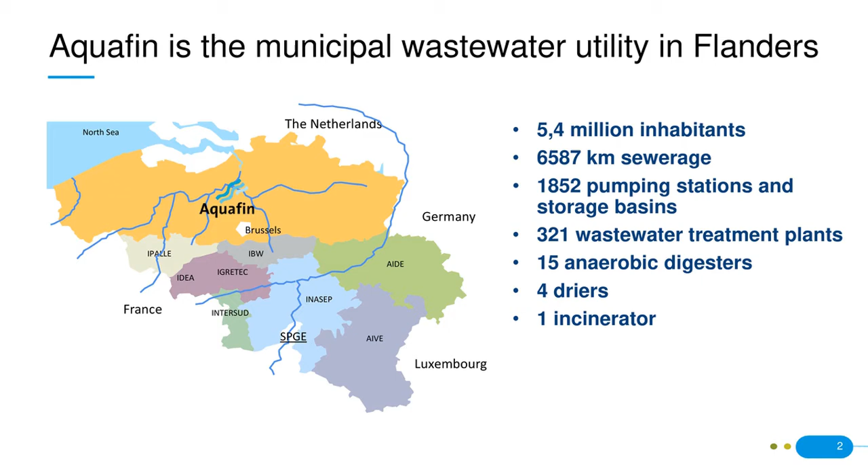I was asked to give a presentation about circular economy in Belgium in the water sector. I'm doing my best to give examples from the whole of Belgium, but I will always refer to cases of Aquafin because those study cases are the ones I know best. I will also talk about a few initiatives that have nothing to do with Aquafin.

I always use the word wastewater. This is my mistake, because wastewater doesn't actually exist. We shouldn't speak about wastewater, because what is waste for one person or one company is not waste, but is a resource for another company.

These are a few examples of resources: COD, which means organic matter, nitrogen, phosphorus, and potassium, that are coming into our wastewater across all 300 treatment plants every year. This chart indicates the breakdown of what happens to these resources. Most of them are lost in the atmosphere as CO2, for example, or nitrogen gas.

Some of them are lost in the effluent, and a big fraction, especially for phosphorus, is lost through the sludge. It's then incinerated.

On the other hand, it makes sense to recover all of these resources because there are reasons why we should recover them. For example, if we look at COD, it takes energy — there's a huge energy consumption needed to remove COD from wastewater. It also causes greenhouse gas emissions.

If we look at nitrogen, it takes energy to remove it from wastewater, but then it takes energy again to fixate nitrogen from the atmosphere to produce fertilizers, which is 1 to 2% of the total energy use in the world. That's huge. For phosphorus, there's resources and mines that are under geopolitical pressure.

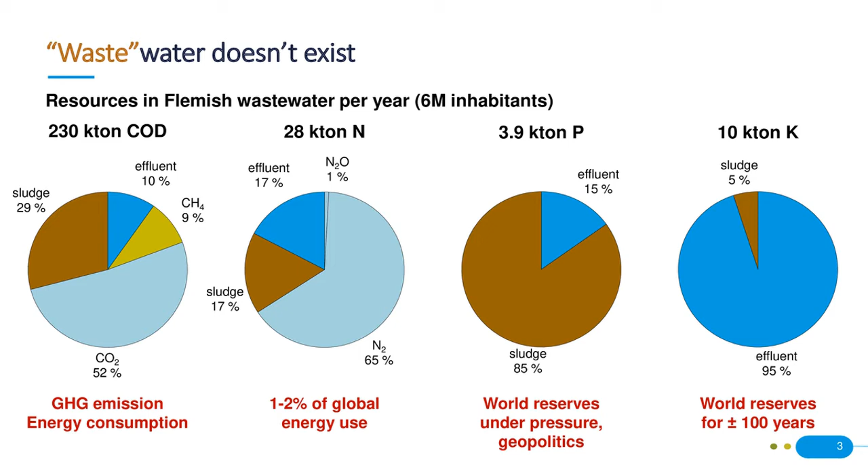For potassium, maybe that's the most urgent resource of all, because we only have reserves in the world for another 100 years. So we need to come up with a way to recover that.

And then maybe the most important resource of all is water itself. Wastewater is full of water that can be reused if it is treated properly.

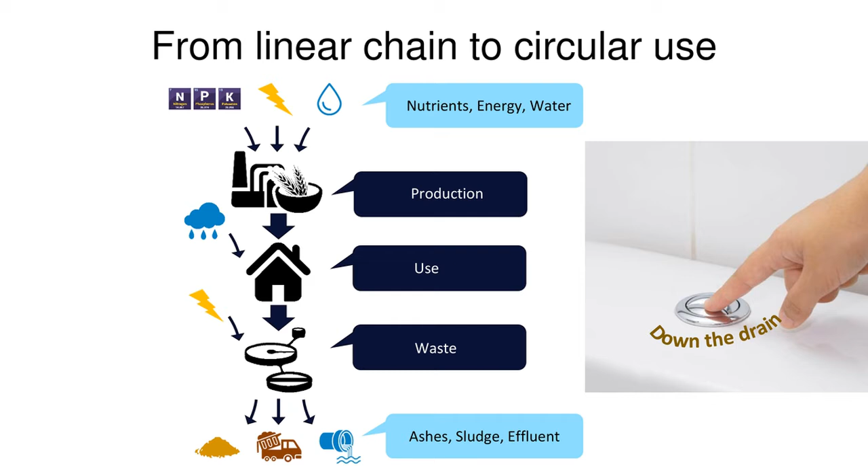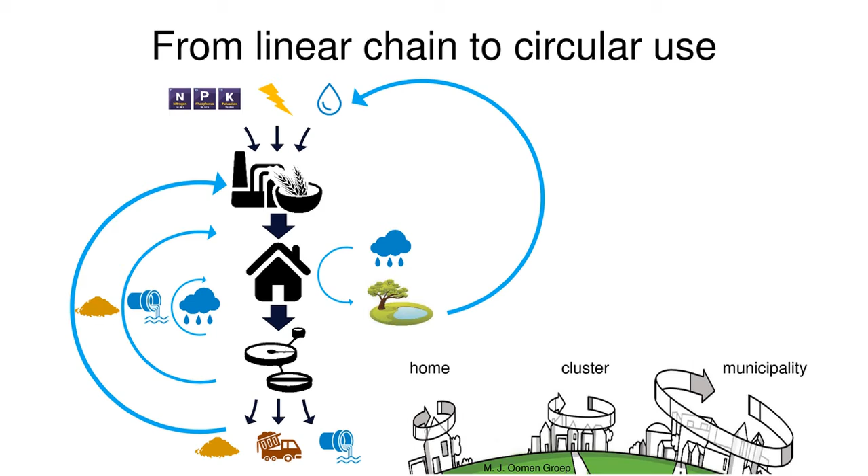You might have seen this principle somewhere else, but the message I'm giving in this presentation is that we need to move from a linear chain of resources, used only once in our economy and then wasted or disposed of as waste in the end, to a circular chain where resources are reused at different locations within the chain, and at different scales, from a household scale to a cluster or municipality or even a national scale.

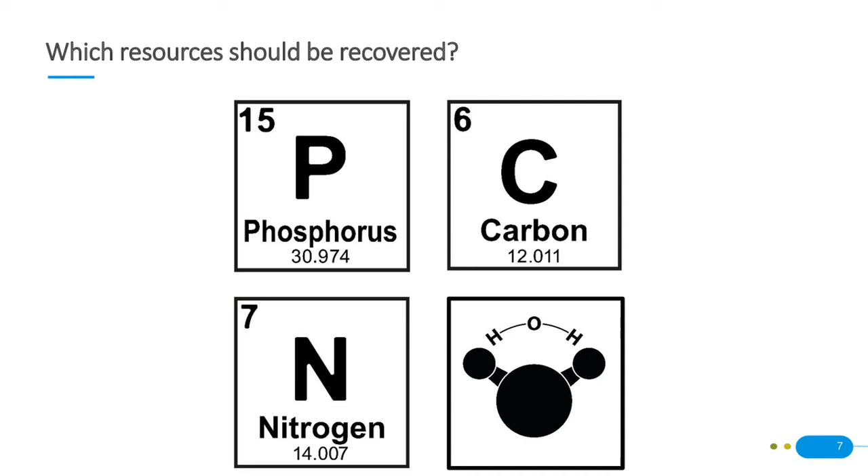A few examples of resources that are being recovered or that can be recovered from wastewater. To start, phosphorus. Phosphorus recovery is pretty simple actually, because phosphorus has fairly easy chemistry.

It can be precipitated into crystal form, or it can be recovered from incineration ash. If you incinerate the sludge, you can leach out phosphorus and produce a concentrated solution of phosphorus that can then be reused as fertilizer.

Phosphorus recovery in wastewater can happen at different scales or at different sites within the cycle. If we start with pure urine, this is an easy way to recover phosphorus. So if you have what's called source separation, you separate urine from the other streams of wastewater. You have a fairly pure stream full of nitrogen and phosphorus that can be easily recovered.

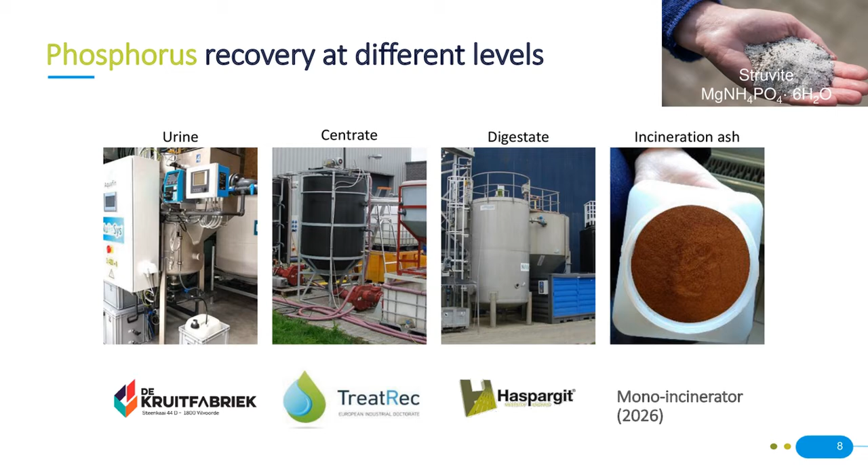There are examples. These are all pictures of Aquafin installations. Examples of recovery installations for phosphorus on the centrate, on digestate of digested sludge. And we're also planning a full-scale phosphorus recovery on the ashes of incinerated sludge by 2026.

Those of you that are familiar with the Volatile project know that we can recover VFAs, so volatile fatty acids, from carbon from the sludge. But also all of these examples - bioethanol, biochar, CO2 itself, humic acids, microbial proteins, etc.

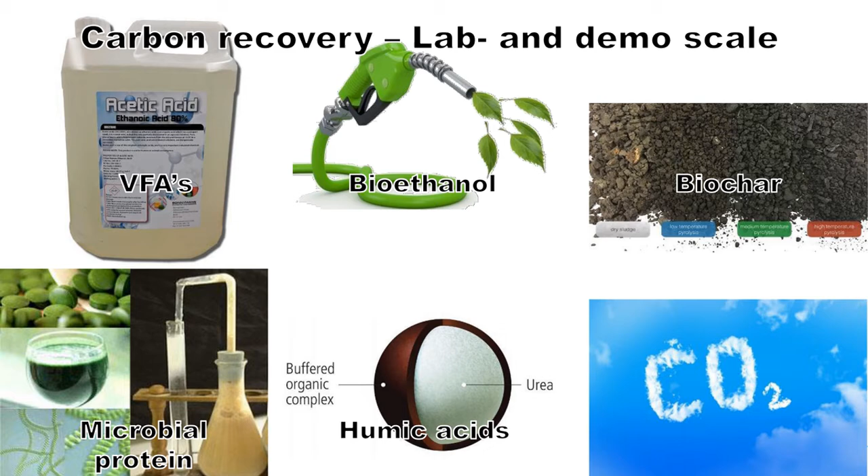These are at different levels of application. Some of them are in the pilot scale stage. Some of them are only in the lab stage.

But there is always a trade-off between recovering carbon as a product or recovering it as an energy carrier. Carbon is a carrier of energy, and if you incinerate carbon, you produce heat or electricity. And so for Aquafin, we are actually focusing mostly on recovering carbon as energy and not as a resource.

This can be done in two different ways: either internally in the plant by optimizing the energy balance of the treatment plant, producing biogas, boosting the production of biogas and recovering electricity by incinerating the biogas, or externally by treating the sludge.

So the waste sludge of the treatment plants can be treated in thermal ways - just incineration - or more novel technologies such as supercritical oxidation or pyrolysis, or things like that, to recover energy from the sludge. I will talk about energy a bit later on in this presentation if there's still enough time.

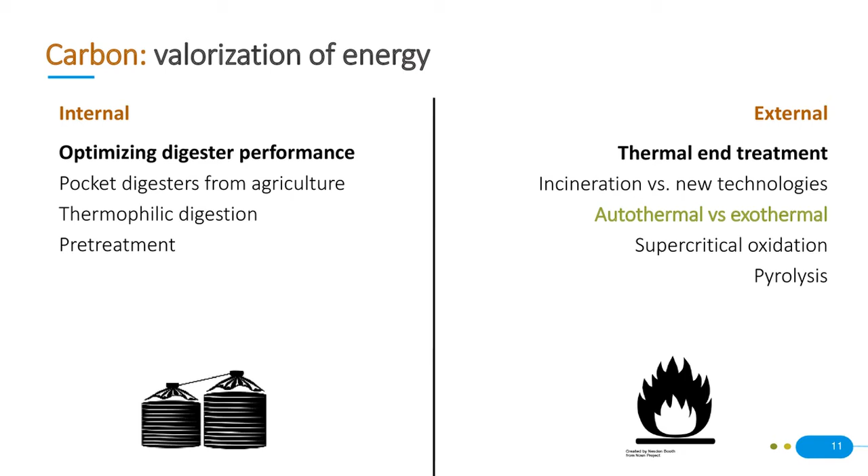Another resource is nitrogen. This is a funny resource because there's actually no shortage of nitrogen. The atmosphere is full of nitrogen. We can recover it by simply fixating nitrogen on an industrial scale to produce fertilizers.

It is not difficult to recover nitrogen from wastewater either. It's mostly a question of energy. It takes a lot of energy to recover nitrogen from wastewater because it is mostly done by stripping ammonia from the wastewater and then precipitating it again to produce a concentrated solution.

So recovering nitrogen is always a question of balancing energy needed to recover it versus the energy that is needed to remove the nitrogen and then fixate it again to produce fertilizers. To boost this development a little bit more, we are planning a demonstration project to recover nitrogen from centrates in our treatment plant, one of the treatment plants we have in Antwerp.

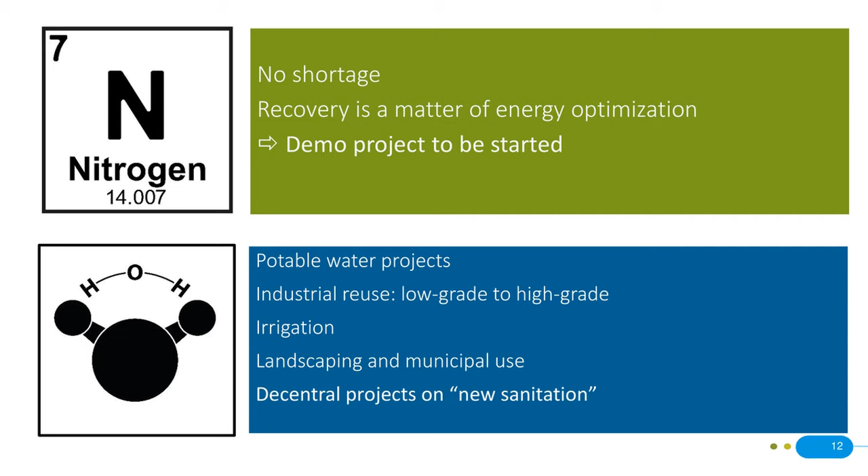And then finally, as I said, the most important resource of all of them is water itself. If we treat wastewater, we produce an effluent. This effluent can either be used directly for low-grade applications, or it can be further processed and treated to produce even drinking water or high purity industrial waters. I will give a few examples of what's happening in the case of water recovery.

Obviously, for personal hygiene and for food and drinks, we need potable water, but we do not need to flush the toilets or do laundry with potable water necessarily. So we should rethink this cycle. How can this be done?

This is my personal opinion on how we should deal with the water cycle. I will walk you through this scheme. So first we have tap water. Tap water or potable water should only be used, in my opinion, for applications that need potable water.

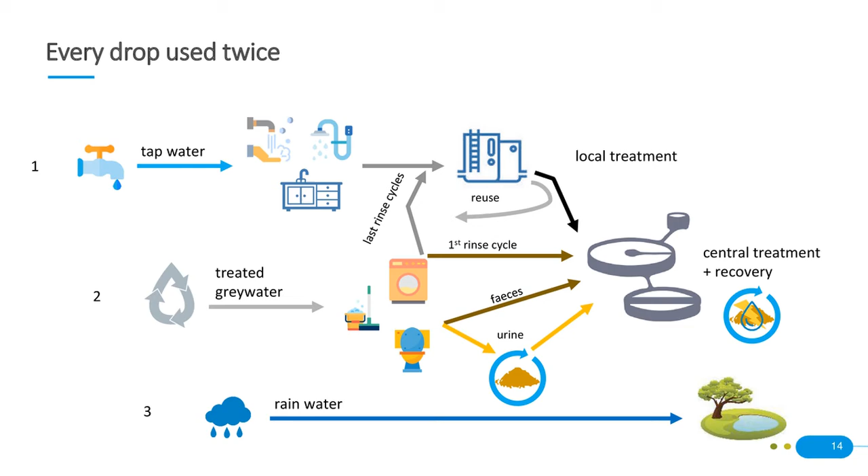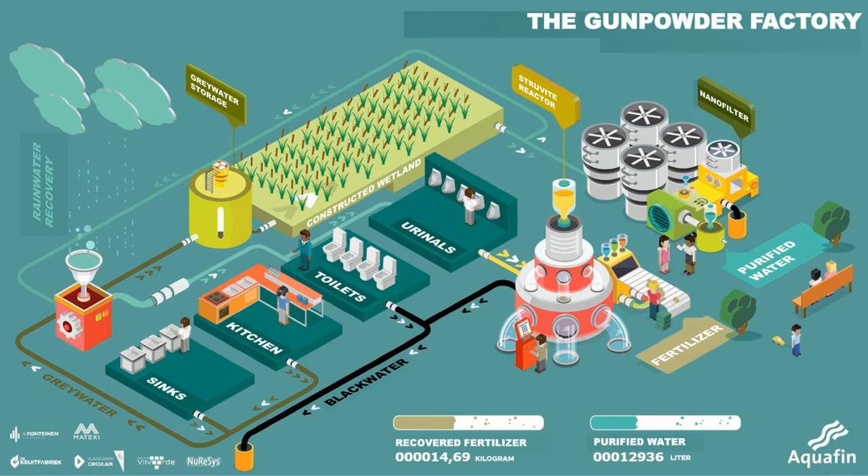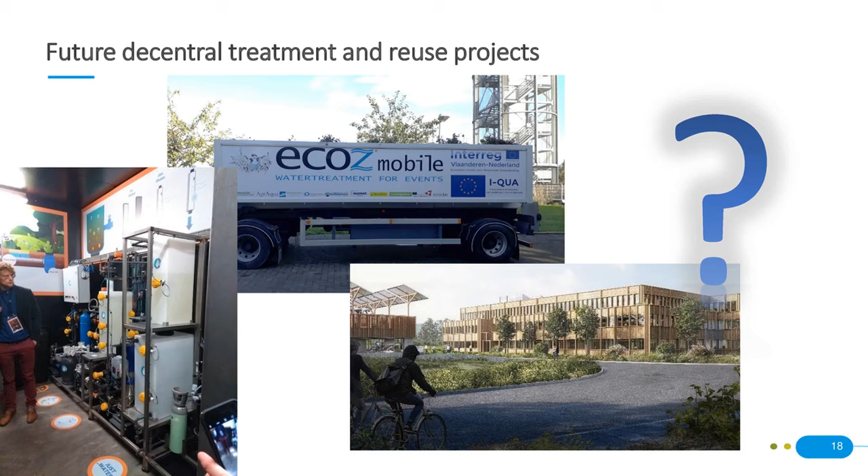Not only Aquafin, but other companies throughout Belgium and Europe are starting lots and lots of initiatives for local, decentralized treatment of water and decentralized production of drinking water. There's lots of examples. This is an example of a mobile treatment unit that treats festival wastewater, because festivals that are often organized in fields don't necessarily have good water treatment. So with this solution, we can drive to the festival and treat the water locally.

A very interesting example I wanted to share with you is the Nieuwe Dokken, the new docks, in Ghent. If this is interesting for you, I recommend looking up their website - it's a very interesting project. It's an example of a circular neighborhood in close collaboration with a nearby factory, where the waste from one player becomes input for another. The waste of the factory is heat - the factory produces lots of waste heat. This is used by the neighborhood for district heating, and then the waste of the neighborhood, the water, is purified locally and used by the factory again as a source of process water.

Another example is the use of our effluents. In our central treatment plants, we produce purified wastewater, or effluent as we call it, which is discharged into the environment. Right now this isn't used very often - sometimes a farmer comes to our facility during a drought in summer to collect some water for their fields. But we want to move to a more standardized approach where we actually have control over the safety, know about legislation and the treatments needed for farmers to reuse our effluents. The new European directive on wastewater reuse is really going to help.

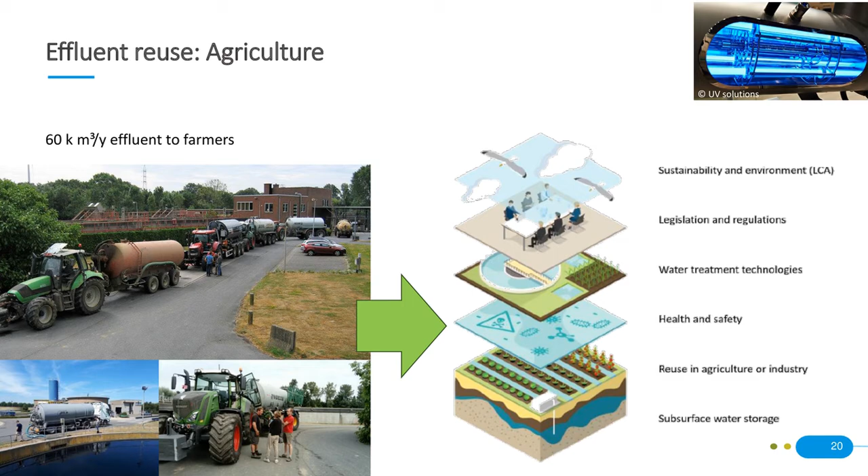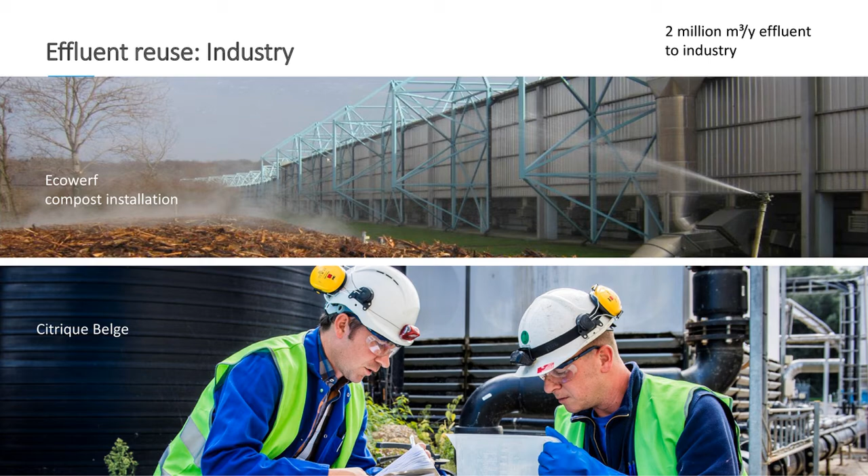Industries are using our effluent - they're using lots of it, actually. For example, this is an example of a compost installation or a chemical factory.

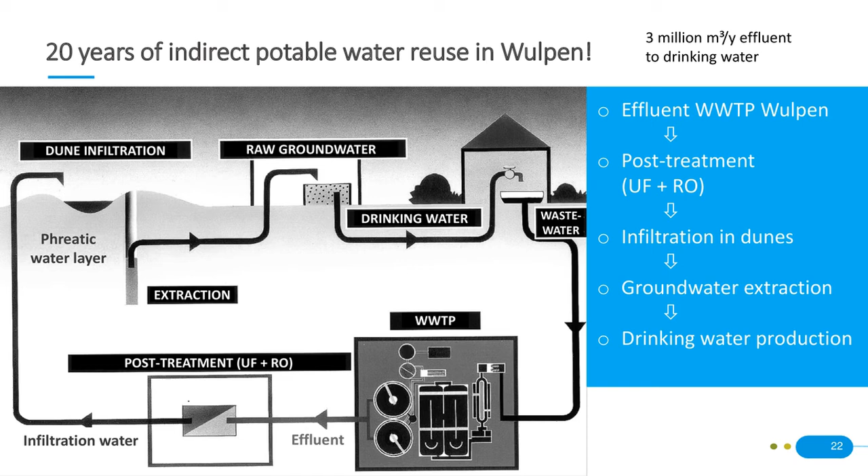But then the most important example is the drinking water plant of Wulpen - I'm not sure, it's in Koksijde, near the coast of Belgium. Not sure if you've heard about this, but this plant has been operating for 20 years, and they do indirect potable water reuse, meaning they take our purified wastewater, the effluent of the treatment plant, and produce drinking water from it, infiltrating it in the dunes for a little while. Only 100 meters after the infiltration site, it is extracted again and used for drinking water production. This is one of the prime examples of potable water reuse in Europe - it has actually been a unique plant in Europe for the last 20 years. Right now there are a few other initiatives on potable water reuse happening all around Europe, but this was a very early adopter of this scheme.

Finally, I'm not sure if time permits, but I promised to talk a little bit more about energy. I'll go quickly over it. As I said, Aquafin is mostly planning to use carbon in the wastewater for energy optimization rather than recovering the carbon as a product.

What can we do to recover energy? Well, the first and most important step is to add anaerobic digestion, so that you can produce biogas.

To boost that biogas production, there are different things we can try. We can have side stream treatment, like anammox, to remove nitrogen in the side stream. We can add a primary settling phase. We can do thermal hydrolysis. And if we add all of these technologies to the treatment plant...

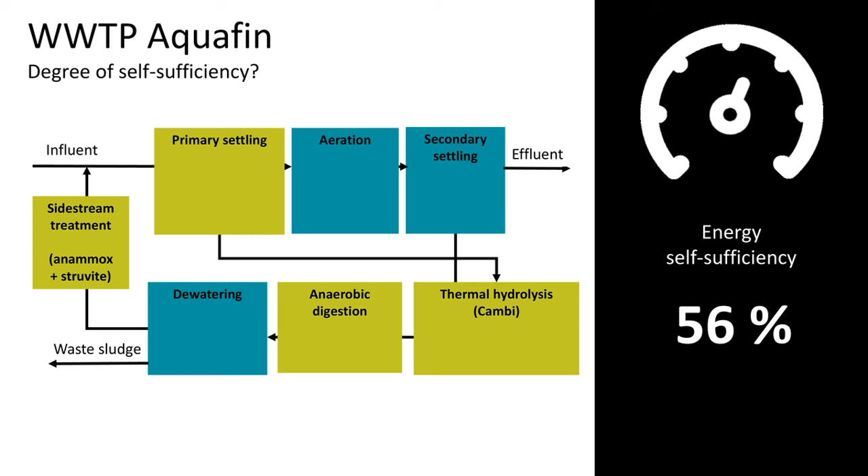...we end up with an energy self-sufficiency of about 56%, which means we can recover or produce 56% of the electricity that we actually need to operate the plant. If we want to go any further than that, we need to rethink the whole treatment cycle.

Or we need to import external energy, such as this example in Tilburg in the Netherlands. This is an energy positive plant, so they actually produce more energy than they need, because they are able to import a lot of external sludge, which is an energy carrier, of course.

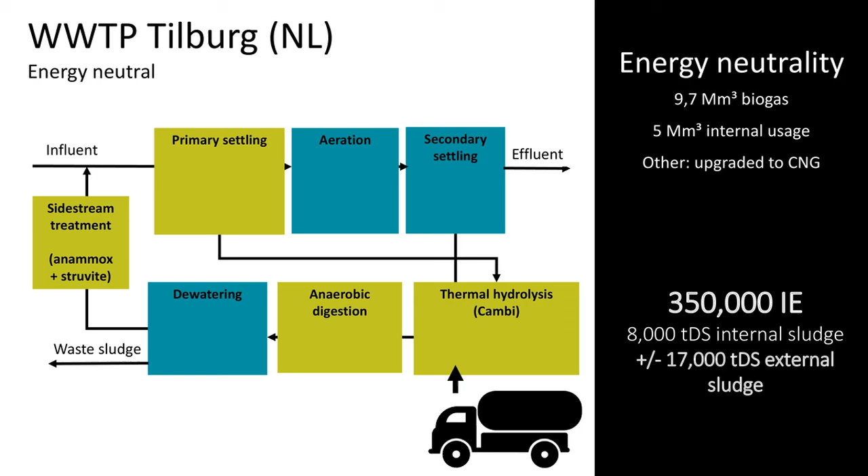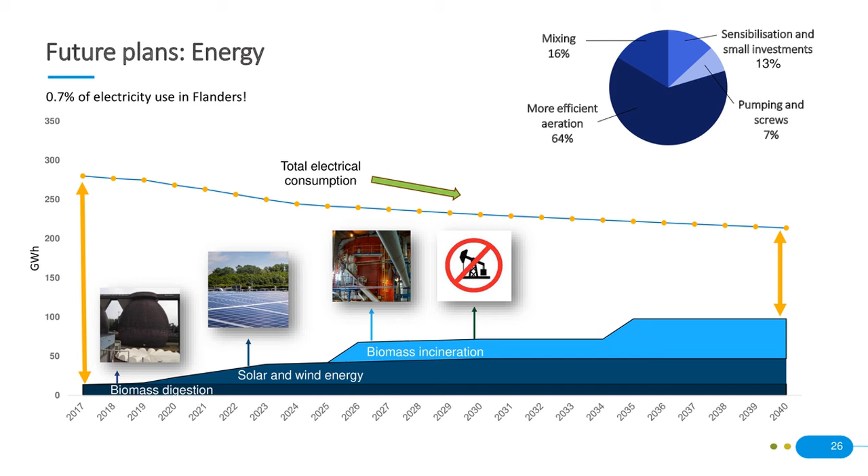Aquafin is planning to increase its energy self-sufficiency to about 50% by 2040, and we can do this by boosting the internal production of energy, not just biogas but also solar and wind, on one hand, and then on the other hand, reducing our overall consumption of energy by being more efficient over the years.

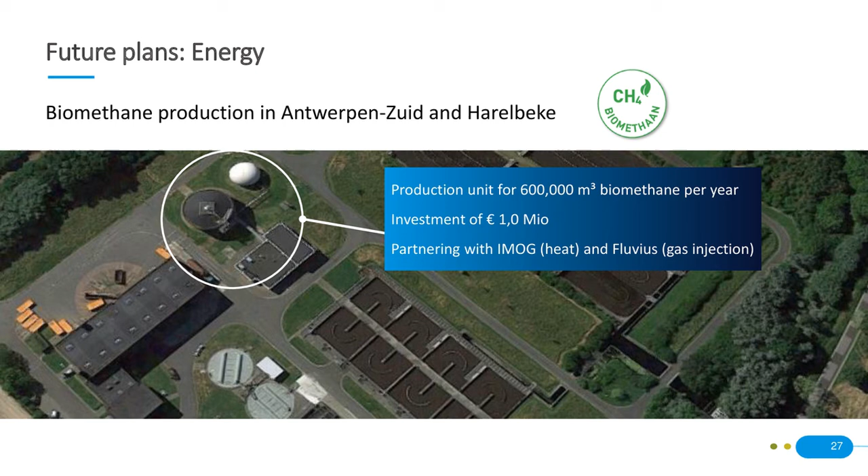We also have a pilot plant running for producing biomethane, so upgrading biogas to a purified form of methane so that it can be injected into the gas grid.